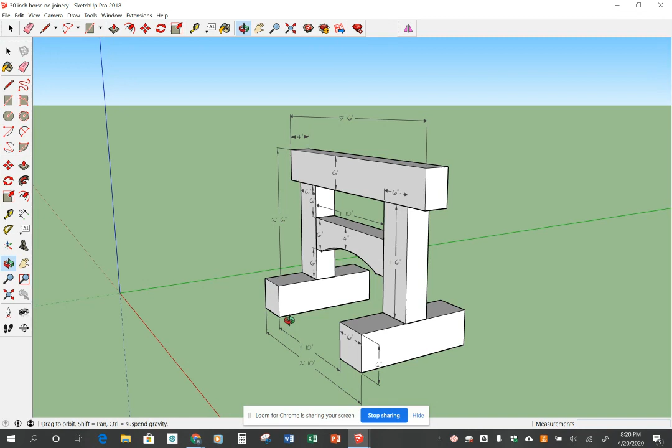In this video, we will be drawing a trestle pony, the model you see in front of you. You'll notice there is no joinery added at this point—we'll do that in our next video. It is a trestle pony used for holding timbers during timber frame layout and joinery cutting.

The trestle pony has a working height of 30 inches and a working width of 42 inches, which seems pretty useful. You could modify that for your height or for the size of timber you're working on simply by shortening these posts, and all the rest of the dimensions would be the same.

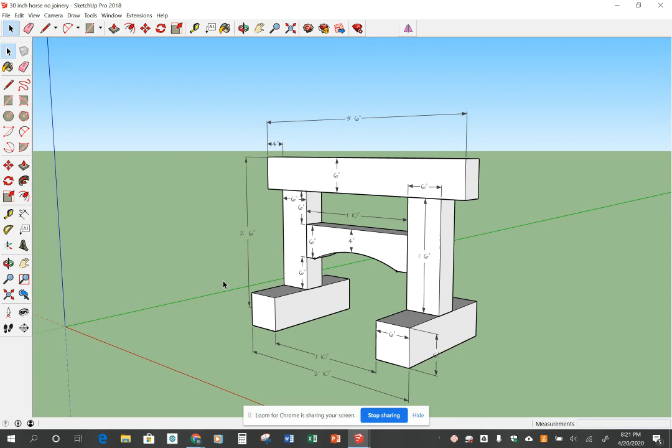These trestle ponies can be made in pairs with the following number of timbers: one 6x6 by 8 foot timber, two 4x6 by 10 foot timbers, and then you would also need some pegs.

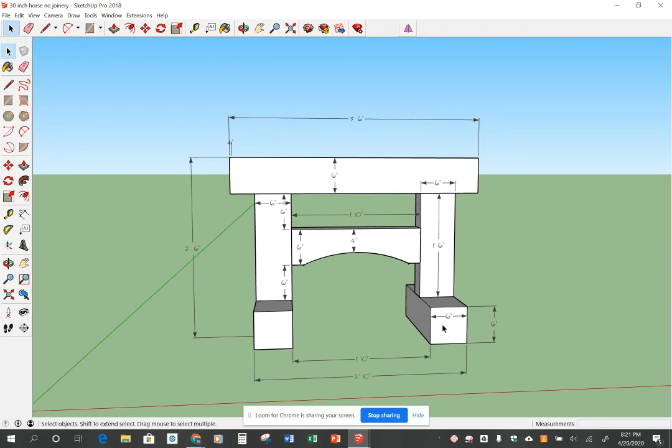In this video, I'm going to show you how to draw this and hopefully how to avoid some common mistakes for beginners. In our next video, which will actually be the third one, I'm going to show you how to include the joinery that you see here.

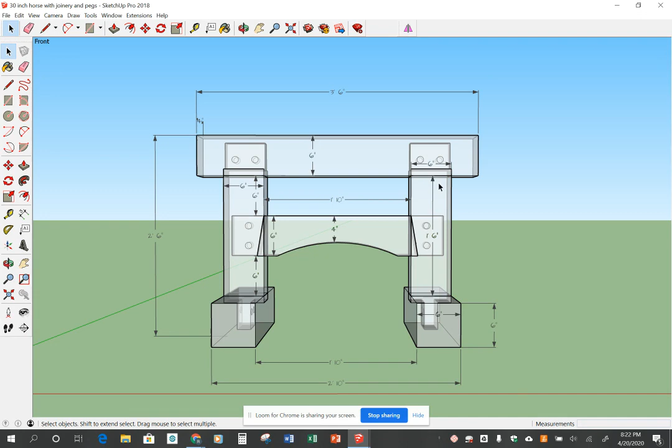This is in X-ray mode. You'll see that tenons have been added. In the video after that in the series, I will show you how to add pegs to your layout.

After all these videos are done, there will be another video that will show you how to make shop drawings and how to put dimensions on those, which will be very helpful.

So we'll start off with our blank SketchUp screen. You'll notice some toolbars along the top. I have it set up so I have a larger toolbox here on the side.

The tools that we will learn to use in this video include the tape measure tool, the rectangle tool, the push-pull tool, the move tool, often called the move copy tool, the dimension tool, and the two-point arc tool.

The specific skills you will build during this video include making and naming components, flipping components along certain axes like the red, blue, or green axis, and how to cut curves in timbers. Aside from learning these tools and skills, I will try to show you how to avoid some common mistakes that I made when I was a beginner.

So let's get started. The first tool is the tape measure tool. If you click it once, then as I hover over an axis, you'll see a little box appears, and right here you'll see an actual origin.

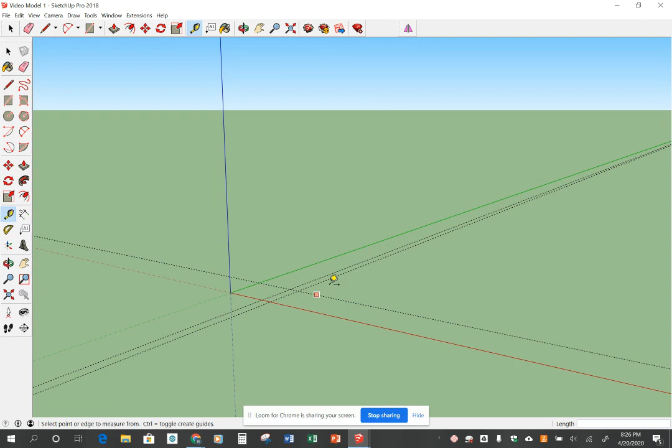Now the base for these I want to be 20 inches long. So if I come up to this line, I click and drag along it, making sure that I'm still showing the green line, which means I'm parallel, and let up, and then I type 20 inches and enter. You see what I've made here is a rectangle that's 6 inches wide, 20 inches long.

So I'm going to use my rectangle tool, click it once, and notice when I hover over these lines, it'll switch to that little red box when I'm right on top of the line, but this is very important. Watch as I connect to this intersection. When that shows that X, I know I'm exactly at that intersection. That's going to be very important.

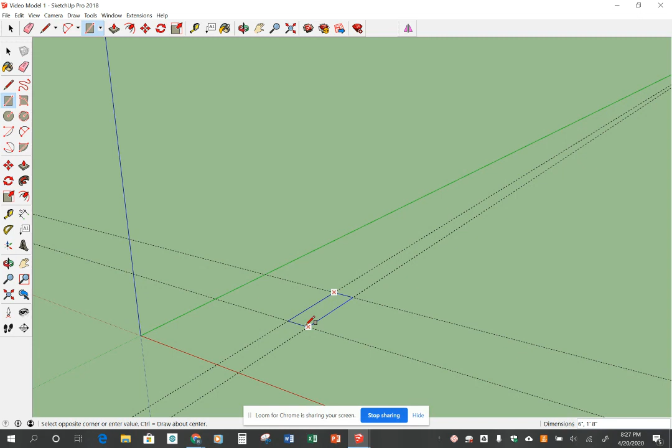So once I'm there, I hold my mouse button down and drag diagonally to the opposite, or the diagonal one, and I see the other X. You'll notice in the dialog box in the bottom right corner, it shows that that is 6 inches wide and 1 foot 8 inches long, which is 20 inches. So I'm going to let up. I've created a rectangle there.

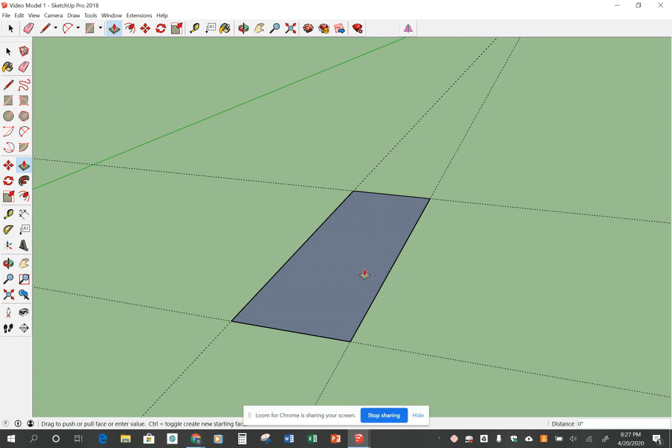Now I need to stretch that upward 6 inches. So I'm going to use the push-pull tool. Notice when I hover over this, well, it's not real easy to see, but the shade changes. Then I'm going to hold my mouse button down and drag upward, let up, and type 6 inches and enter.

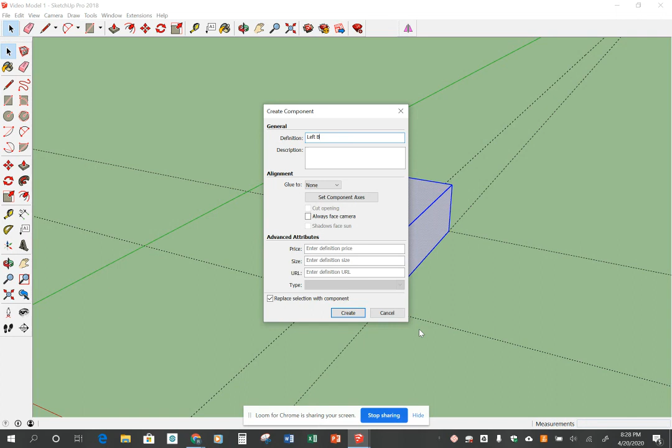Now I'm going to right click, come down to make component. I'm going to give it a name - I'm just going to go left base. And then I'm going to click create. Then I'm going to hover over the select tool and click just somewhere outside of that component, and the blue goes away. So I've created this and named it. I've given it a name, and it is a component. That's going to be very, very important.

Now the spacing for my next base, or foot of the trestle pony, from inside to inside - so inside diameter, I suppose you could say - is going to be 22 inches apart. So I'm going to come back to my tape measure tool. I'm going to grab that line.

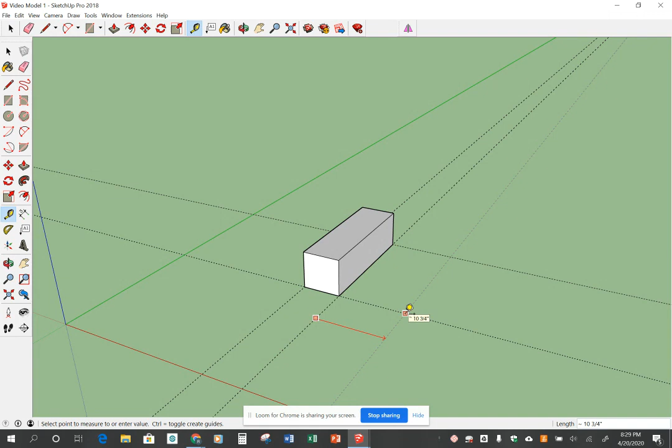And then I'm going to move this way. Now notice how I have a red line now. That's going to be very important. I can make sure I'm on a red line if I hover over a perpendicular line and just follow it. And then I'm going to type 22 inches and let up. So this is my inside space.

So I could come back and I could pull out another 6-inch guideline here, and that would be fine - just redraw it completely, or I can actually make a copy of this. So let's do that. This is our move copy tool. I'm going to click it once, and you'll notice it is a different cursor now. I'm going to come over to this corner, because what I want to do is slide this whole thing over to here. But this is going to be my inside diameter complete empty space, so I don't want to drag this edge, because it would come out to here, and the inside diameter would be 6 inches less.

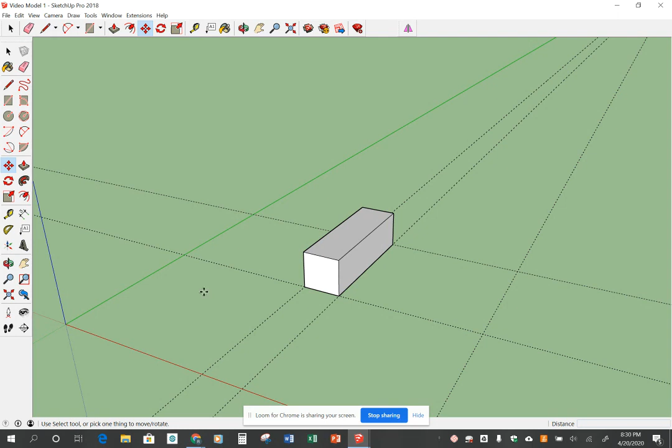We don't want that. So I'm going to drag it from this corner. Now this is very important. If I tried to move it now, if I just held it and slid it, well, I'm moving the whole thing. I didn't want to do that. I wanted to make a copy. So I'm going to come back to Edit, Undo. It's back there now. Now, as I hover over it, if I hit Control - this is on PC - you'll see a little plus sign showed up.

So now I'm going to go down to that corner, and because I have a guideline there, I can just drag along that guideline until I get to that intersection, and it snaps to that spot. I can double check it with my guideline by just going here and dragging across, and I have 1 foot 10 inches, which is the 22 inches I want. So everything is fine and dandy. So I've made a copy of this base and put it over here.

So any changes I make to this one will automatically update to this one and vice versa. That's going to be important. We'll talk about that later on. You can make that work differently. So I'm going to actually now delete these guides, because when you start having a lot of guidelines, they get confusing.

So I'm going to go up here and delete guides. The next thing I need to do is put some vertical posts. The posts are 4 by 6, and I want them centered in these feet. So I'm going to come up to my tape measure tool again.

Notice when I'm on a corner, I have a little purple circle. As I go along, I have a purple box, but then when I get to the center of it, it snaps to the center and I have a circle again. That's very important. I'm going to click there, then slide this way to find the midpoint of this. So if I just go along here on the edge, I keep sliding until it gets to that circle.

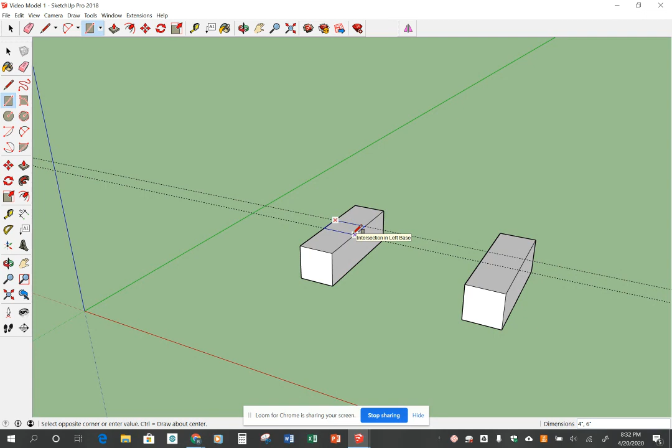So what I'm going to do now is draw another rectangle starting right here. And again, notice the X. I click it once and then just drag to the opposite corner and click it again. Then I'm going to use my push-pull tool to drag that upward.

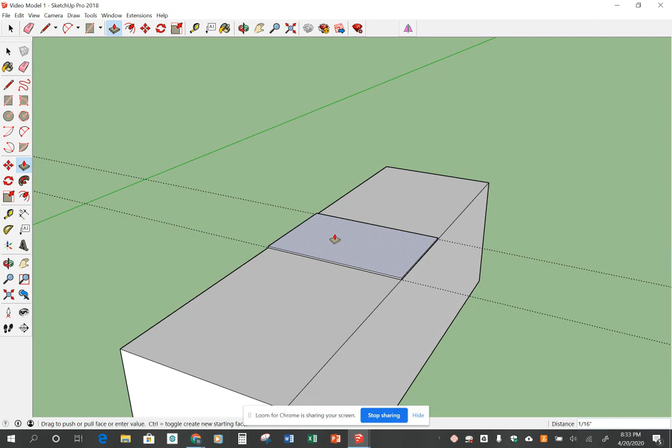And these are going to be 18 inches. So if I use my push-pull tool, notice how when I go over it, it changes the shade and there's a little polka dot pattern. I grab it, hold my mouse button down, and start to slide up. I let up, then type 18 inches, enter, and I've now made a post.

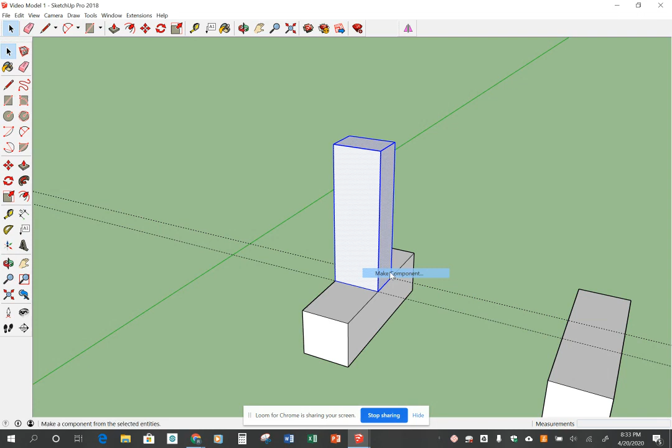Here's the dilemma: if I don't make it a component, it will assume it's still part of this component. So we're going to go through the make component process again. I'm going to triple click it, then right click, make component. I'm going to name it post 1 and create.

I'm going to click outside it, and I can do the exact same thing I did when I made this other copy. I go to my move copy tool and come over here. It's important—notice I want the post, not the base. So the post lights up blue.

I'm going to hit Control and you'll see a little plus sign show up. I'm going to grab that corner and drag it right along that guideline. The guidelines are very important to help you line things up. When I get it there, I just let up on my mouse, and there it is. So I have made a copy of those posts.

I'm going to delete guides again because they're messy and in the way. By the way, I have a mouse with a roller ball, and as I roll forward or backward, it zooms in or out. If I hold the roller ball down and move my mouse, it pans around, or orbits, as the actual term is.

Okay, so now we're going to make the top plate. And this is a little bit trickier, but not too bad. I'm going to go with my tape measure tool. In this case, I don't want to be right at the center. What I basically want to do is make a dash line that goes across this.

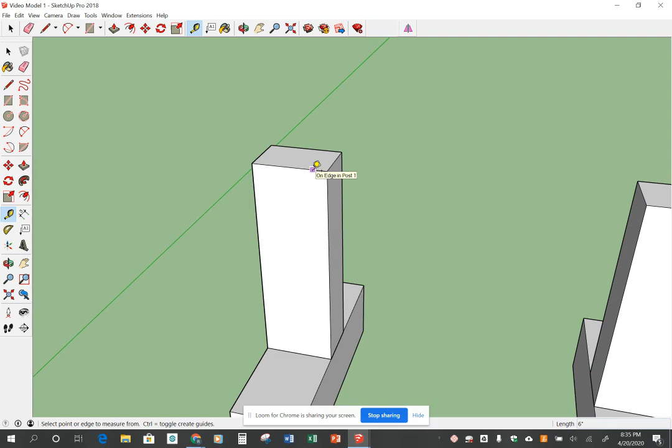So if I start here and then come over to the corner and click, there's a guideline. Alternately, I could come down here and drag a guideline up, and that would work the same way. So I have that, and I'm going to do the same over here. I have a guideline, and you notice it's 1 foot 6 inches, just like I want it.

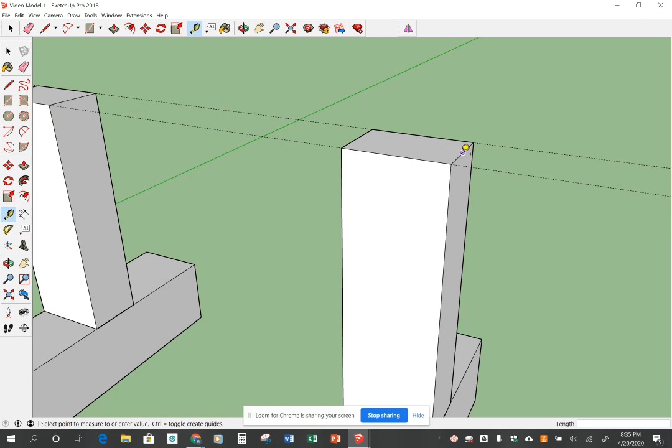Now we want the top plate to be 42 inches wide. Our outside spacing from post to post is 34 inches. That leaves us an 8-inch difference, and this is going to allow our top plate to hang 4 inches over on each end. So I'm going to come to the center here, click once, and start dragging. I'm going to hover over that other dashed line and type 4 inches. I'm going to do the same thing over here.

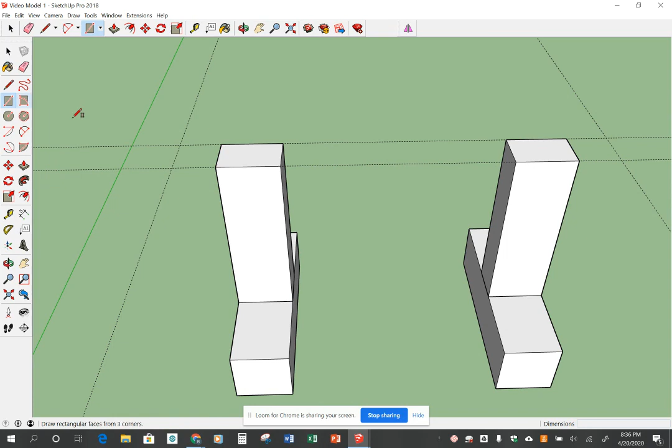Four inches. Now I can make a rectangle that goes from this corner. Remember, I need that X to this corner. You'll see down in the bottom right in the dimension dialog box, it says 3 feet 6 inches, which is the 42 inches that we want. And it's 4 inches wide.

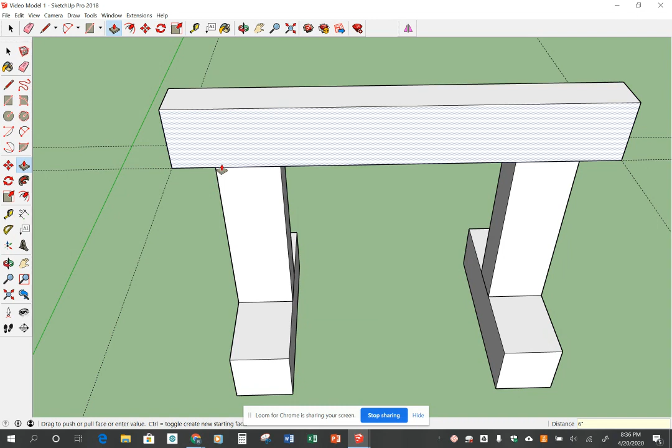So I just click, and now I have a rectangle there. I'm going to use my push-pull tool and drag it up. This is a 6-inch top plate. I'm going to delete the guides to get them out of the way.

But now I have to make this a component. So I'm going to triple click it, right click, make component, and I'm just going to call it plate. You can call it whatever you want. Then I'm going to create that and click outside it.

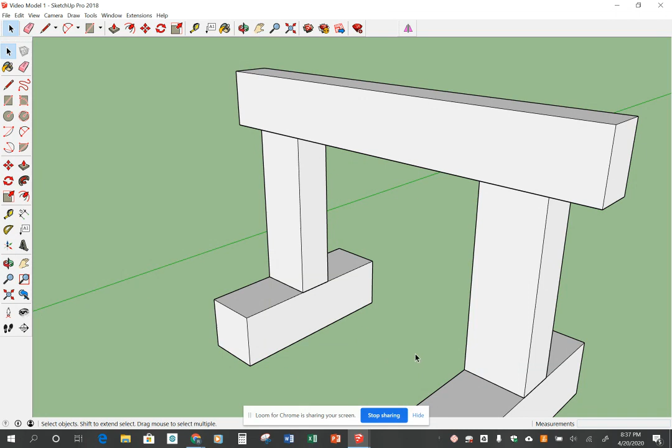So now the only thing left is to draw the tie beam. The tie beam is 6 inches tall by 4 inches wide, and I want that centered here. So I'm going to use my tape measure tool, grab here and drag down. If I go along the side, I'll wait till it turns into a circle. Boom, and there I'm at the midpoint, which is 9 inches.

I can now grab that line and go upward, because this is going to be 6 inches tall. So if I go 3 inches up and then 3 inches down, that has drawn that out. I can get rid of my center guideline, just clicking delete after I highlight it.

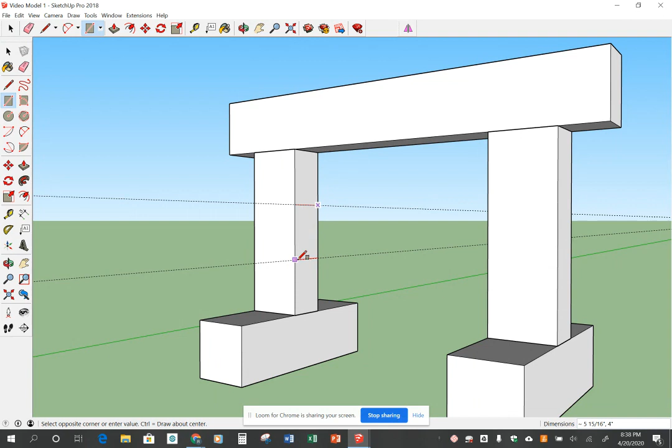I'm going to draw a rectangle here, this time from this corner. Notice the X. I'm going to click it once and then drag downward. I really need to find that X, and something's not looking right. There it is. Once I have that, I can drag this across here till it gets to the midpoint, and then let up. I have created that tie beam.

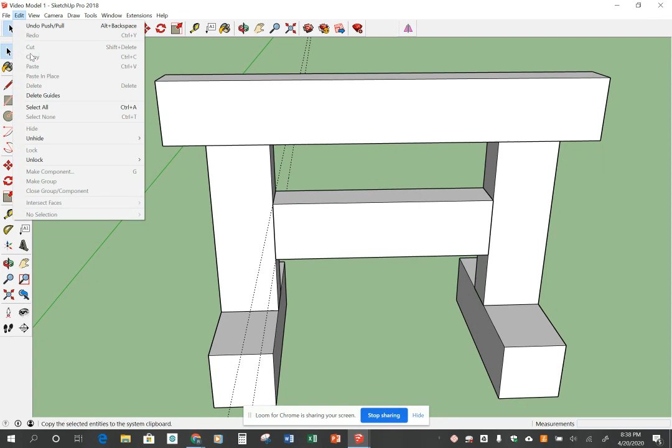So I'm going to delete guides, and you will see that this is centered. So the next step is, it's really nice to have this decorative curved arch here.

I'm going to use the tape measure tool a little bit differently. I'm going to come over and grab it. Now, instead of making a guide line, I'm going to make a guide point. So instead of grabbing in the center and dragging this, which gives me a line, I'm just going to go to this corner. Notice here it's like a hollow circle, and down here it's an actual dark green circle.

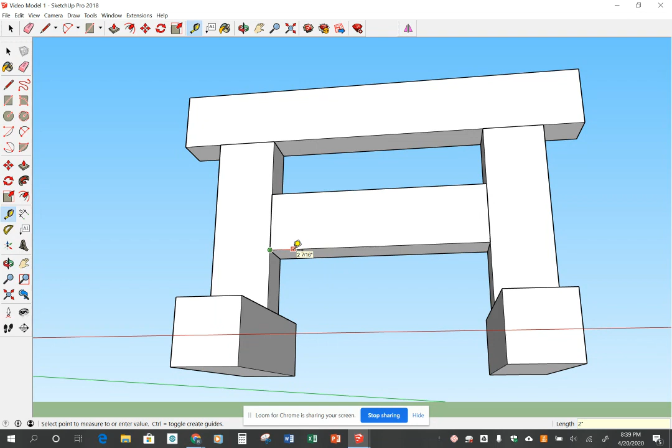I'm going to click once, then drag this way, and type 2 inches, enter. You'll see I have this little tick mark there now. That is my guide mark. I'm going to do the same thing over here, dragging along that line, 2 inches, and then come up to my 2-point arc tool.

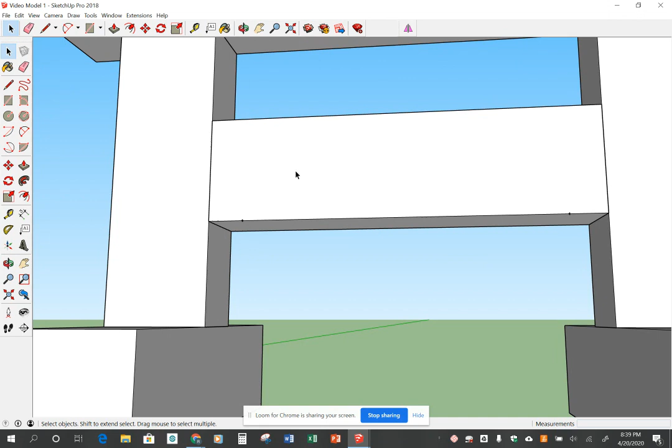Oh, I just remembered I have not made this into a component, so that's a problem. I'm going to undo the guides. I'm going to triple click this, make component. I'm going to call it tie, and then create.

So now that I've made it a component, I'm going to triple click it because I need to identify that I'm going to change that tie. Now I'm going to go back and do my guide points. So 2 inches here, 2 inches here, and then I can come back and use my 2-point arc tool.

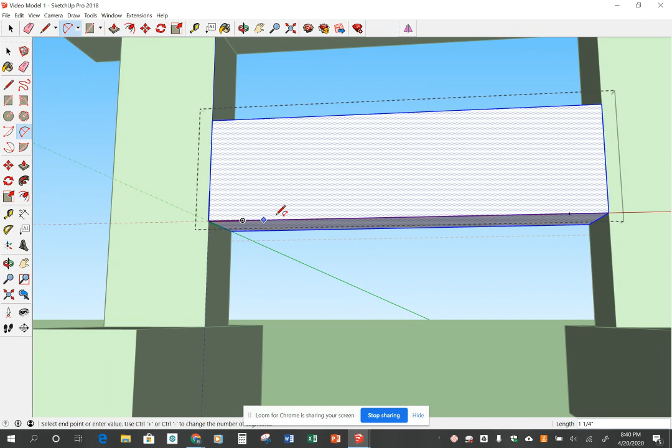So I click that, and then if I come to this point, click it once, and then go to this point and click it once, and then move it upward, then I will type 2 inches and enter, and it has created an arc that is 2 inches in from each end and 2 inches up from the bottom. So it will be 4 inches down from the top.

When you're doing regular timber frames, you never want to take more than 1/3 of the timber out when you're doing a curve, which is something we do on braces frequently.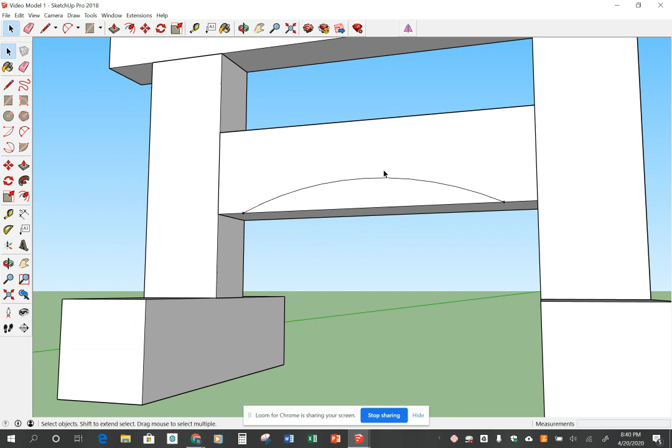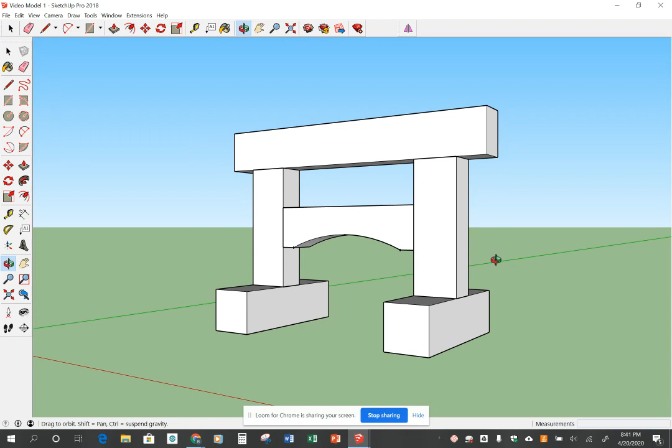So I'm going to triple click this to activate it, and then go up to my push-pull tool. Now you'll see, because that arc is there, I can highlight just the curve that I want, hold my mouse down and slide backwards, and it's gone. Then I go back to my select tool and click outside, and I have drawn this complete model without joinery.

Okay, so I'm just going to take a moment and show you the dimension tool. This is right over here, so I can click on that once. If I now come up to here and click once, then slide my mouse and click again, and slide it up, that gives me the dimension there.

And that shows you your dimensions. You can put them wherever you want. So this concludes this video tutorial. In our next video, we will draw joinery into this model. Hope you've enjoyed this.